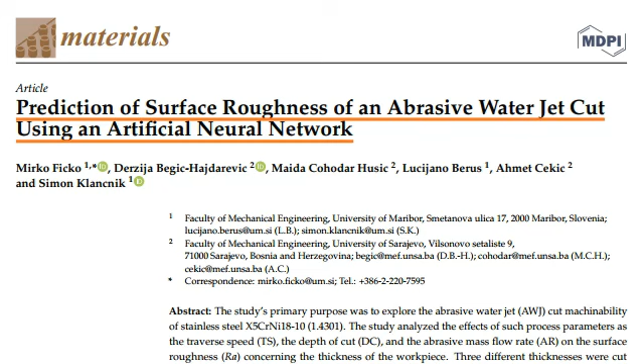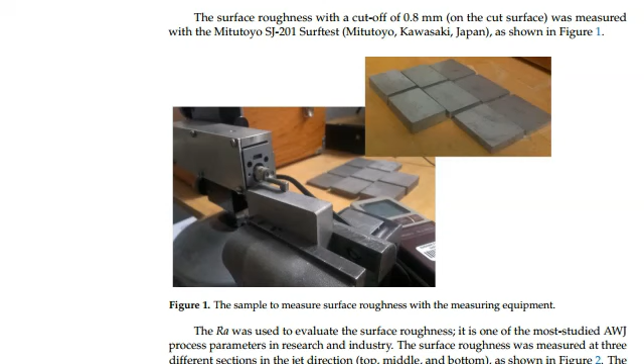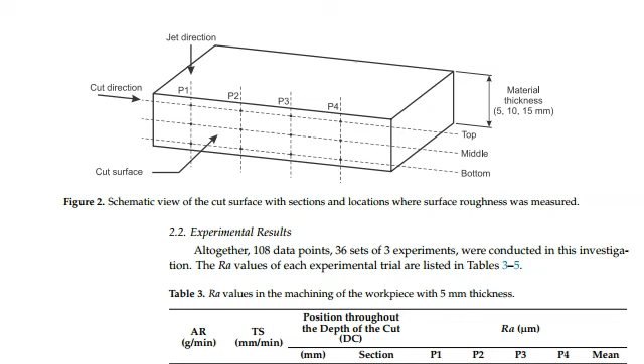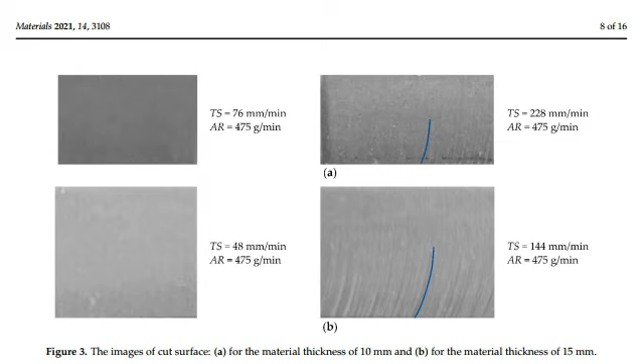The study's primary purpose was to explore the abrasive water jet, or AWJ, cut machinability of stainless steel. The study analyzed the effects of such process parameters as the traverse speed, the depth of the cut, and the abrasive mass flow rate, or AR, on the surface roughness, or Ra, concerning the thickness of the workpiece. 3 different thicknesses were cut under different conditions. The surface roughness was measured at the top, in the middle, and at the bottom of the cut.

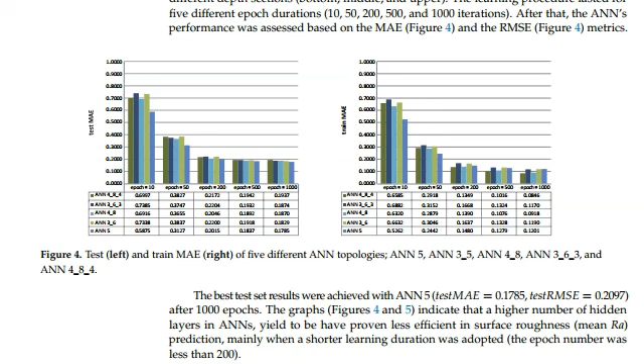Experimental results were used in the developed feed-forward artificial neural network, or ANN, to predict the surface roughness. The ANN's model was validated using k-fold cross-validation. The lowest test root mean squared error of 0.2084 was achieved. The results of the predicted surface roughness by the ANN model and the results of the experimental data were compared.

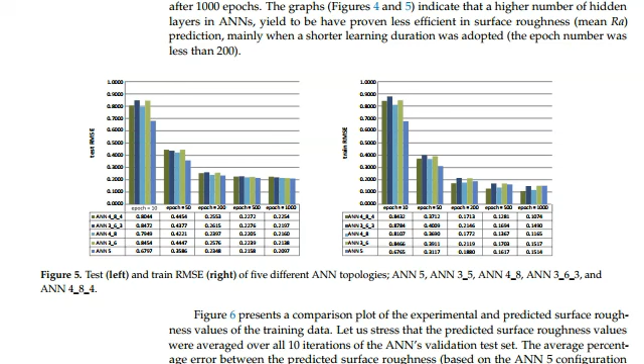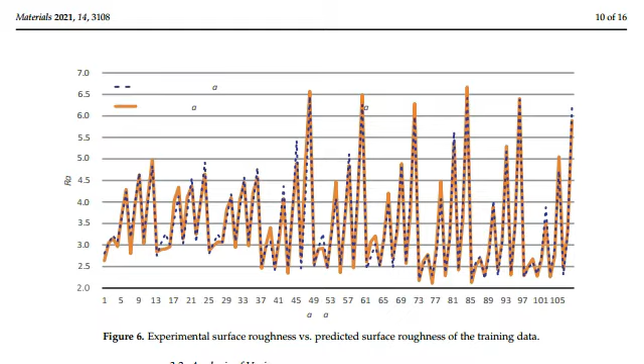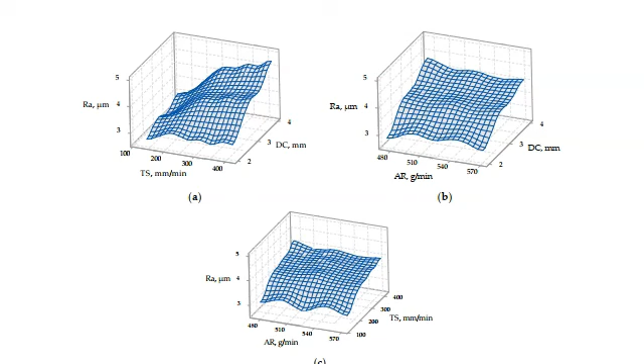In summary, this study's novelty consisted in its introduction of the ANN method as a useful tool for predicting surface roughness along the entire depth of the cut at AWJ cutting of stainless steel of different thicknesses. Its main benefit is the reduced time needed for experimenting.